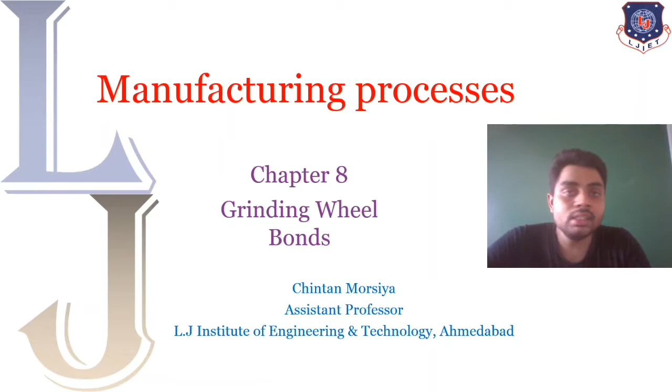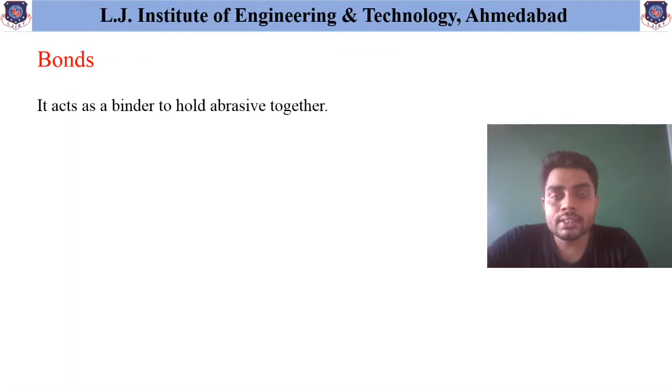So first of all, let us understand what is the meaning of bond. This bond acts as a binder to hold abrasives together in the grinding wheel. As we know, in the grinding wheel, over its periphery, a number of abrasive particles are attached. How tightly these particles are attached to each other depends on the type of bond used.

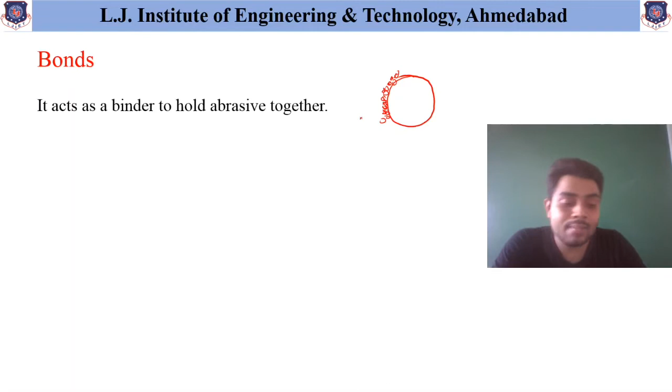There are many different types of bonds available: first is vitrified bond, second is silicate bond, third is oxychloride bond, fourth is resinoid bond, fifth is shellac bond, and sixth is rubber bond. These are the different types of bonds used for manufacturing grinding wheels. We will discuss all of them one by one in detail, starting with vitrified bond.

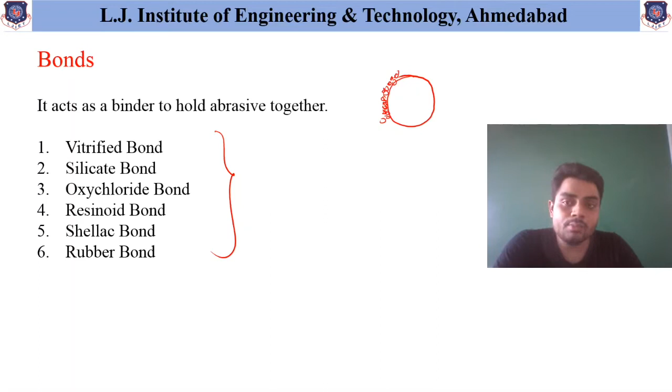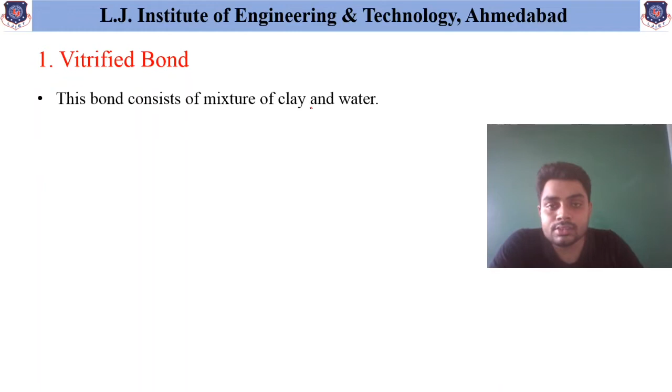So first of all, how is this vitrified bond formed? In the first step, this bond consists of a mixture of clay and water. Clay and abrasives are thoroughly mixed with water to make a uniform mixture. When this mixture is obtained, it is molded to the shape of a grinding wheel and then dried up to a certain point to take it out from the mold.

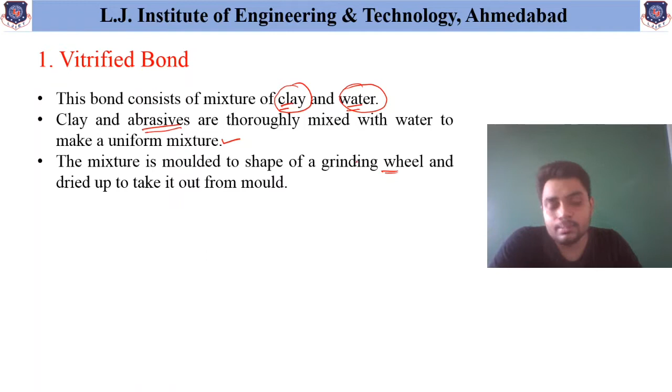That means when this mixture is molded into the shape of a grinding wheel, it is given time to dry up, and when it has dried, it is taken out from the mold. Then this perfectly shaped wheel is heated just like in brick making. The important step is to heat this grinding wheel, which results in the strength obtained by combining all the abrasive particles.

The wheel obtained using this vitrified bond possesses good strength and porosity to allow high stock removal. That means if vitrified bond is used, it is useful for removing a larger amount of material from the workpiece. There are some disadvantages of this vitrified bond also.

The major disadvantage is that it is sensitive to heat, water, oil and acid. That means if the grinding wheel comes into contact with water, oil or acid, or into an environment with higher temperature, it may deteriorate the performance of this vitrified bond. Its impact and bending strength are also very low.

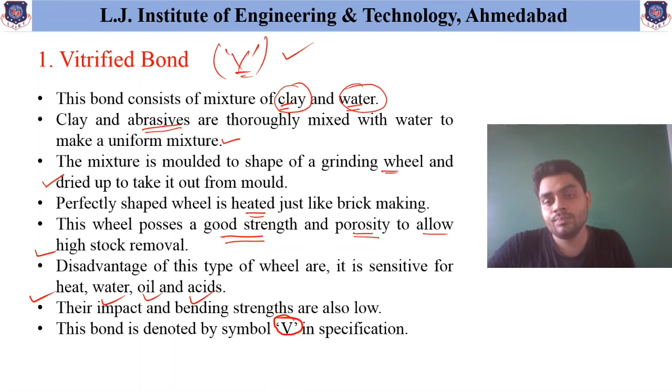In the specification, as we discussed in our previous lecture, this vitrified bond is indicated as V. So if V is indicated in the bond section of the specification, we can understand that vitrified bond is present in that grinding wheel. So this is the basic detail about the vitrified bond.

The second one is the silicate bond. Silicate bonds are made by mixing abrasive particles with silicate of soda, or water glass. By using this combination, silicate bonds are formed.

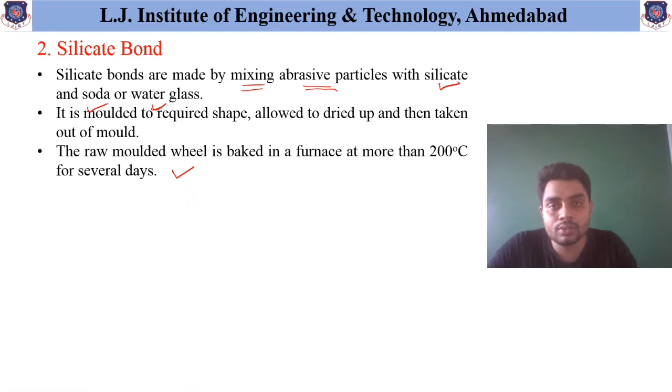After mixing all the materials required to form this bond, it is molded into the required shape, allowed to dry, and then taken out from the mold. The raw molded wheel is baked in a furnace at more than 200 degrees Celsius for several days, because in this silicate bond water content is present during mixing, so drying is necessary for proper use of the grinding wheel with silicate bond.

This wheel exhibits waterproofing properties, so it can be used with coolant. When a grinding wheel has silicate bond, the supply of coolant is feasible and it helps to maintain the surface finish. In grinding wheel specification, this silicate bond is indicated by the letter S.

So the next important bond, that is the oxychloride bond. In this bond, proper mixing of abrasive with oxide and chlorides of magnesium is required, because these bonds are formed easily by mixing the abrasives as listed over here with the oxide and the main important material, that is the chloride of magnesium, which helps to form this oxychloride bond.

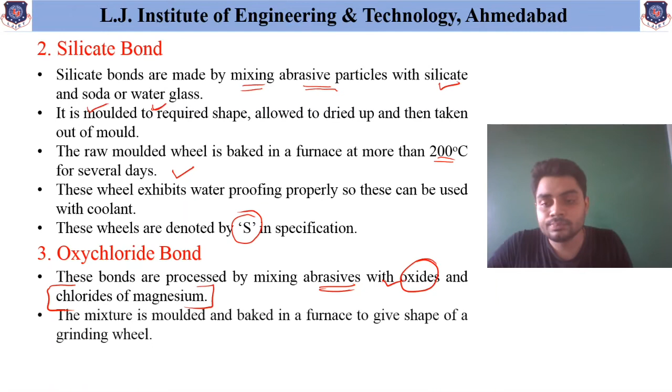And then again the next step is common, that is it is molded and baked in the furnace to give the shape of a grinding wheel. These grinding wheels are used for disc grinding operation. So when a grinding wheel has an oxychloride bond, it may be useful for disc grinding operation. And in the specification of the grinding wheel, this oxychloride bond is indicated as the letter O.

So again, if we summarize the first three bonds, the vitrified bond is indicated as the letter V, the silicate bond is indicated as the letter S, and the oxychloride bond is indicated as the letter O. So these are the main important parameters of these three bonds.

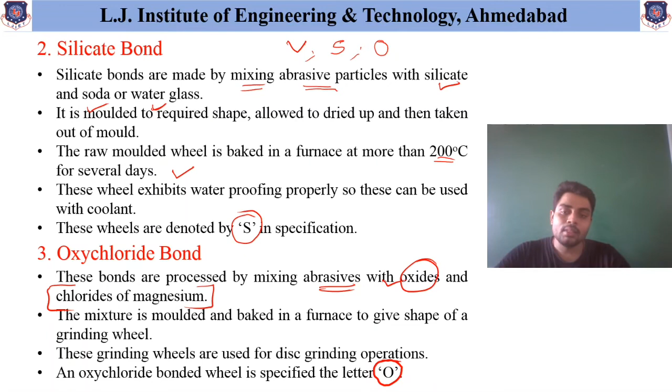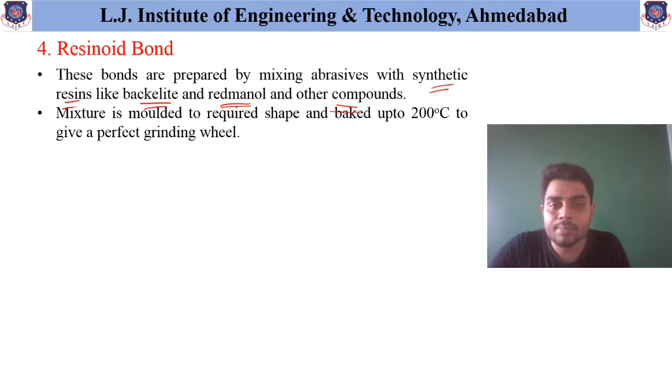The next, fourth bond is the resinoid bond. This resinoid bond is prepared by mixing abrasive with synthetic resin, and these synthetic resins are like bakelite and redmanol, and other compounds are also used to obtain the required properties. The second step is mostly common in all the different types of bond: after mixing all the required materials, this mixture is molded to the required shape and baked up to 200 degrees Celsius to give a perfect grinding wheel.

And these wheels have good grinding capacity at higher speed. That means when the grinding wheel is required at very high speed, this resinoid bond is helpful. And these are used for precision grinding of cams, rolls and other objects where high precision of surface and dimensional influence on performance is important.

So based on the requirement of high precision, this resinoid bond is used for bonding the abrasive particles in the grinding wheel. And this resinoid bond is denoted by the letter B in the specification of the grinding wheel.

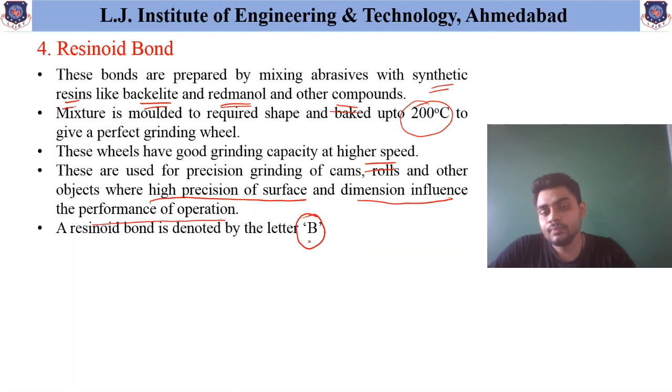Now the next one, that is the shellac bond. This shellac bond is prepared by mixing abrasive with shellac, and then it is molded by rolling. So again I am repeating, this shellac bond is prepared by mixing abrasives with shellac and then molded by the rolling process. So in this particular bond, the molding is obtained by rolling operation.

And the grinding wheels having shellac bond are recommended for cool cutting on hardened steel and on thin sections. It is also useful for finishing of chilled iron, cast iron, steel rolls, hardened steels, cams and aluminium pistons. And this shellac bond is denoted by E in the specification of the grinding wheel.

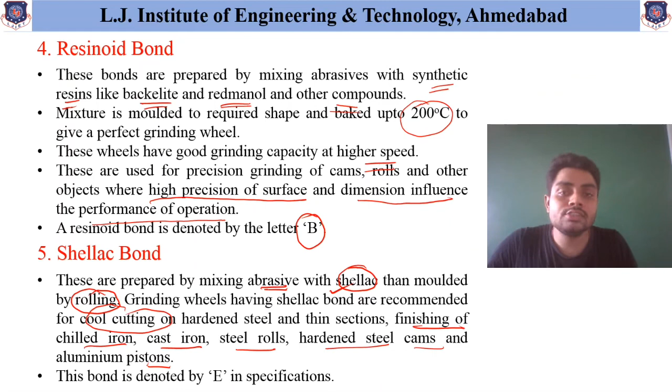So up to now we have discussed the main important bonds that are used for grinding wheels. So if we summarize all these different types of bonds and their characteristics, the first one is the vitrified bond. This vitrified bond has good strength and high porosity, and its designation, as we have discussed earlier, is shown over here for all the different types of bond.

Similarly, the silicate bond is useful if the operation requires waterproof work, it is used for large diameter wheels, and it is used for grinding of fine edge tools. The shellac bond is useful for thin wheels, for high elasticity, and it is not suitable for heavy duty application. So this shellac bond is avoided for heavy duty work.

The resinoid bond is useful for rough grinding and high speed grinding. The rubber bond is used many times for thin wheels, for fine finishing and polishing purposes. And the oxychloride bond is used mostly for the disc grinding operation, and it is used when the material is less brittle.

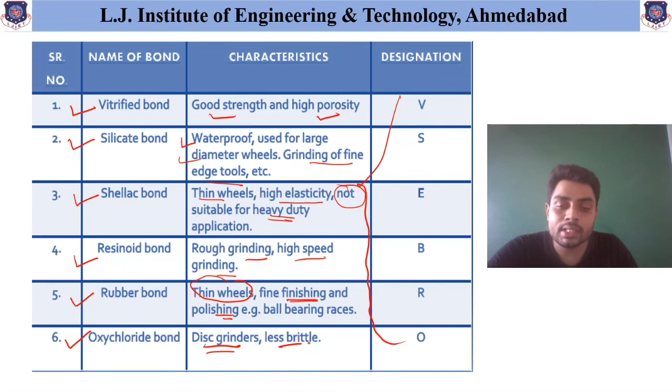So in this lecture we have summarized the different types of bonds that are used in grinding wheels. I hope it is clear to you where these specific types of bonds are useful and where they are required for a specific application.